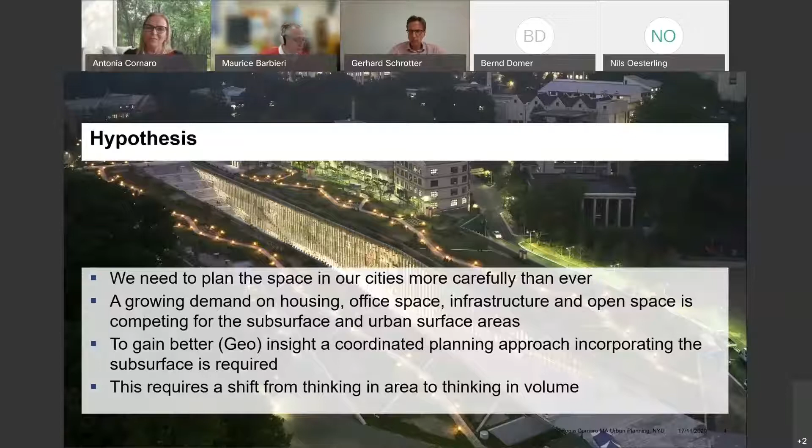I will briefly talk about challenges our cities are facing, the need to visualize the subsurface, which is really very much the topic of today's event. Data, data, data. Where do we get it? How do we process it? How do we use it? And why do we need a new planning methodology for urban planning in general, including the subsurface? A bit on work in progress and some conclusions.

So the use of underground space, be it contemporary or future infrastructures, requires space. And we are rapidly running out of surface space. At the same time, we really want to and need to keep our cities livable. We cannot use every last bit of public space for new infrastructures. And underground space use offers a lot of advantages in that aspect. So what are these advantages?

It is much easier to create unhindered and direct connections in the subsurface. We don't have any surface impact on communities when we construct and house infrastructures underground. Well, let me put it that way, maybe during construction, but not once they are in place. We have no environmental impact on the surface. We have rapid development of a new layer of supplemental infrastructure possible, and we are allowing for new combinations that serve the modern needs of the city, be it data transmission, be it telecom, be it cargo movement, whatnot.

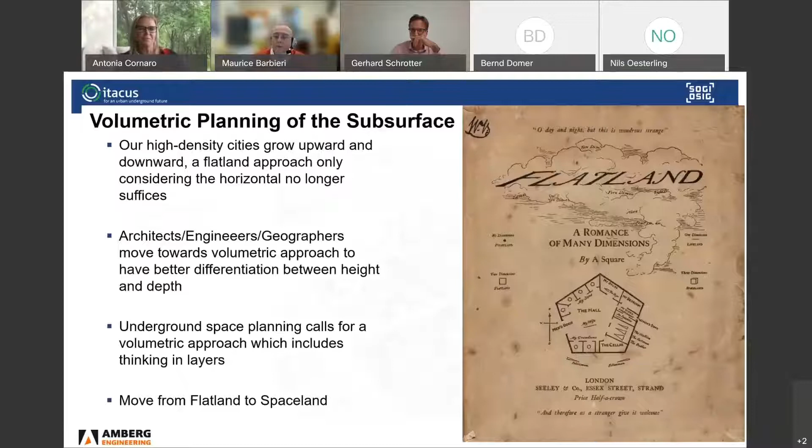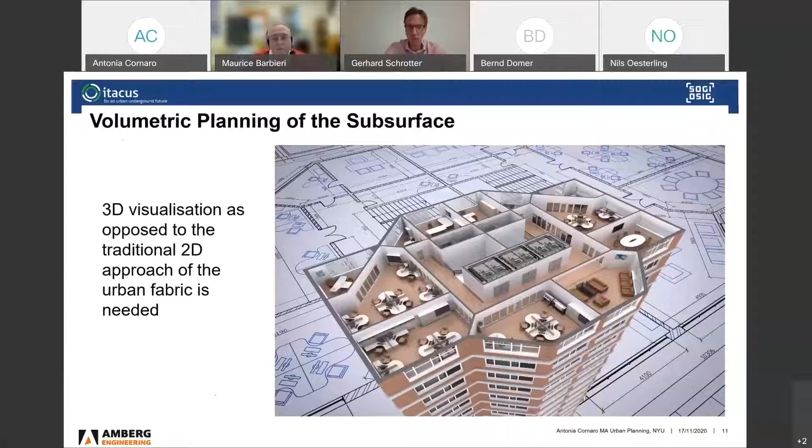So a 3D visualization, as opposed to the traditional 2D approach of the urban fabric, is needed. Traditionally, we have planned our cities in 2D. So we want to really push this to the 3D volumetric approach.

Once more back to Abbott and his Flatland, where he describes what it would be like to live in a 2D world. This existing paradigm, which consists of extending surface planning practice downwards, isn't working. The overarching reason for this is that underground space calls for a volumetric approach. So the world Abbott describes is a far cry from how we actually observe and interact in our physical world, which is three-dimensional. And in the same way, we propose that planning of the subsurface is radically different from how we have been planning our cities up to now.

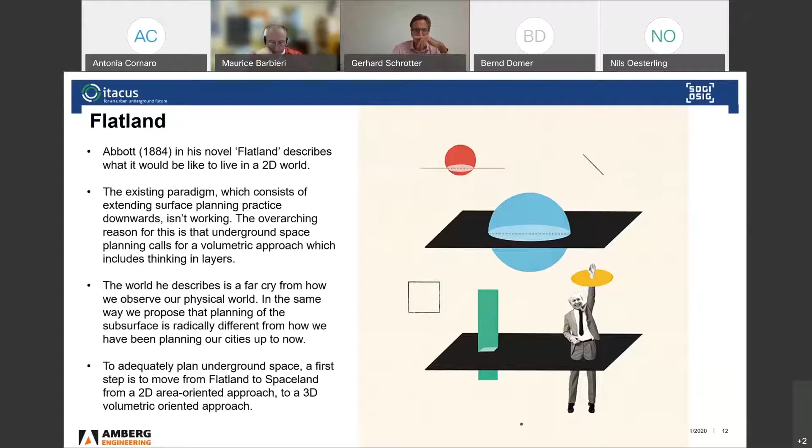So the role of geology in all this is, of course, a big one. On the surface, buildings are surrounded by air. Below the surface, buildings are contained inside the earth. They become part of the subterranean. And the planning approach must be one where the geology is the single most important factor.

So here we have an example of a yaodong. Those are traditional sunken habitations in the north of China, which is a very windy plateau, the Loess Plateau. But there it's also very easy to dig out these habitations. And they at the same time protect the population or inhabitants from the harsh, windy climate.

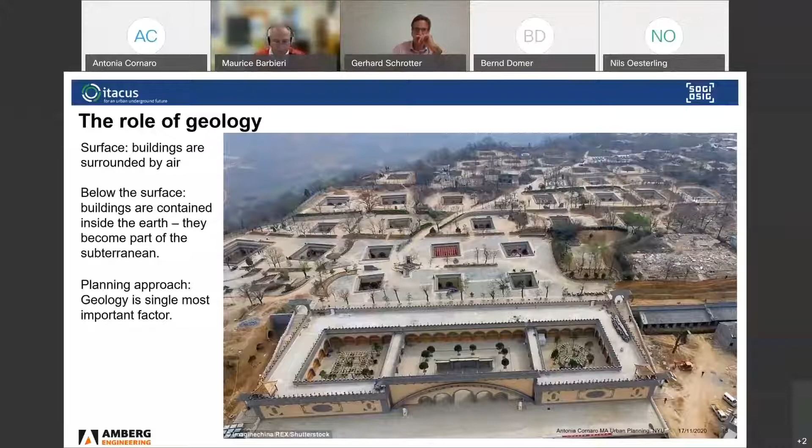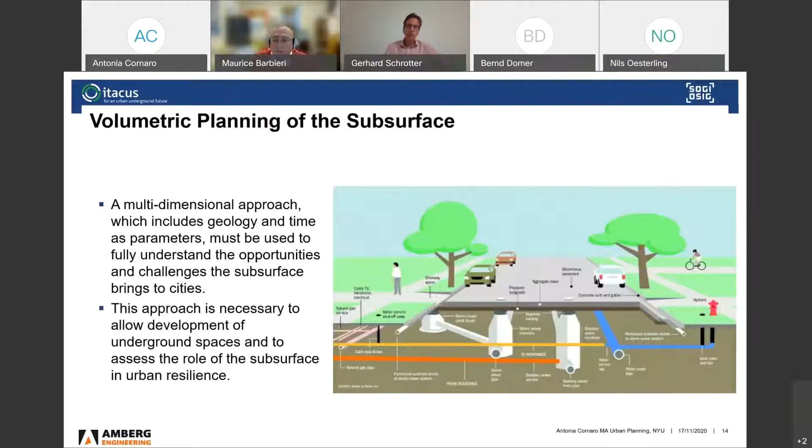So the volumetric planning of the subsurface really needs to be a multidimensional approach, including geology and time as parameters. It must be used to understand the opportunities and challenges the subsurface brings to cities. So which instruments do we use to visualize and analyze 3D? Well, we have BIM, we have GIS, and the technology to visualize underground space is already widely available.

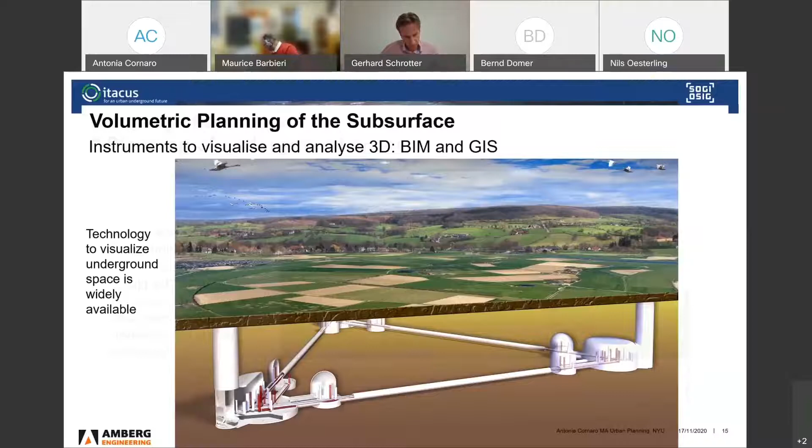However, having the technology alone available is not enough. We really need to develop a new methodology when planning the underground space. And actually, we can think about using airspace as an example. Because airspace, the aviation industry, thinks in volumes. The airspace industry blocks volumes of space and allocates them to certain functions. So I want to ask, is that a concept which could serve as a basis for a new methodology for underground space planning?

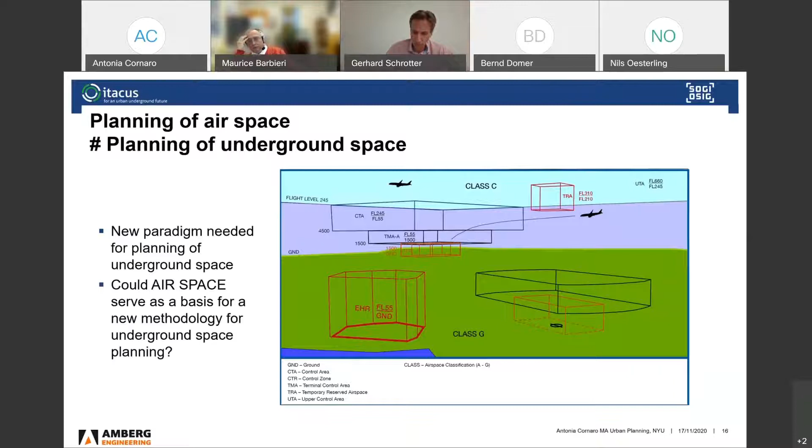How do we deal with data? We love data, don't we? And we need tons of data with what we are setting out to do. Data on geology, on soil composition, necessary to plan and construct underground. We also need data on the cultural heritage, the subsurface houses, archives, archaeology. And we, of course, want to map and visualize existing but also future planned projects. So data needs to be acquired, stored digitally, and made available by combining it in 3D models to support urban planning.

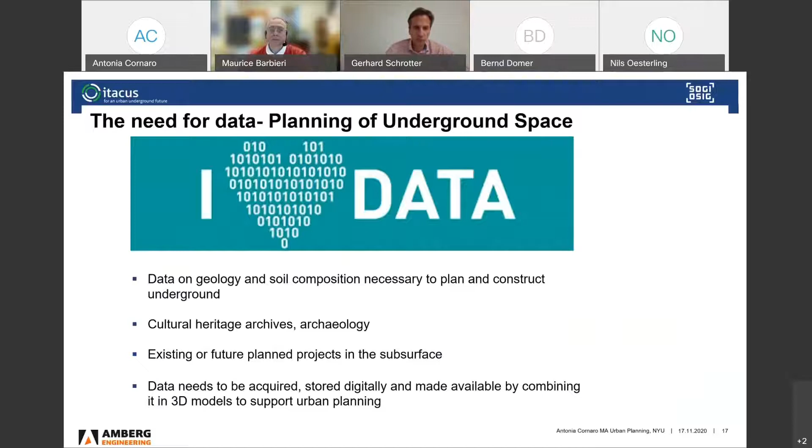"Im Schweizer Untergrund herrscht das Chaos." This is actually a headline I saw in a paper last summer, where the Swiss government is planning a reliable documentation of pipes and cables in the underground. Apparently it's over 500,000 kilometer network. And Swisstopo's answer was, it is time to produce knowledge. What have we buried in the subsurface? How can we use this knowledge to our advantage and plan for a better and resilient subsurface of our cities?

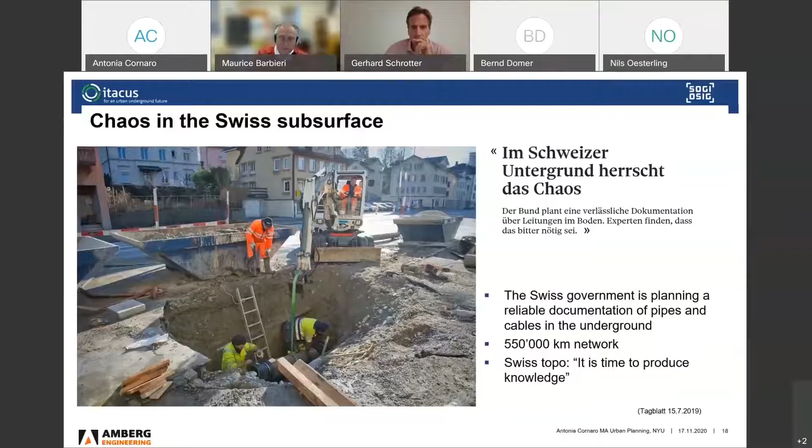Other countries are doing that as well. For instance, the UK with its National Underground Assets Register, where they have to depict 1.5 million kilometers of underground services, keeping their country supplied with water, gas, and electricity, but all run by different companies and owners. So how do you make sense of all that? How do you keep an overview of all that?

So also Singapore has embarked on a big mission in that sense. The digital underground project between the Singapore Land Authority and the Singapore-ETH Centre, because one realizes that the underground is so essential for the planning, administration, and development of its future underground space.

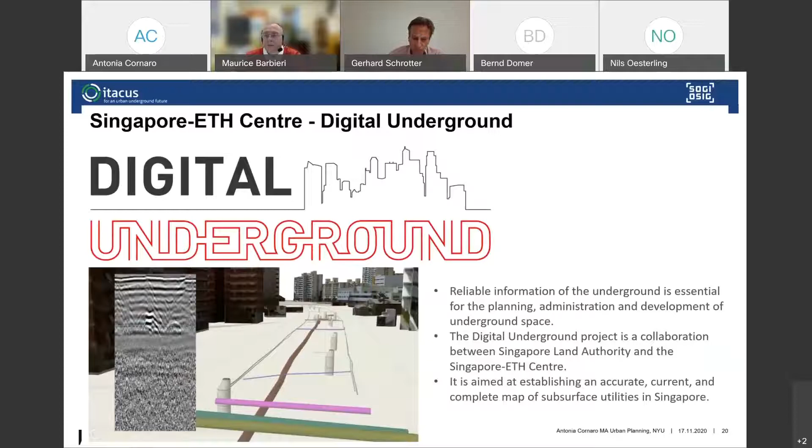So the need for data, there's also the ASK platform, Accessing Subsurface Knowledge, which is a collaboration between the British Geological Survey and Glasgow City Council. And it's really to present all available and future data in urban 3D models. Because a poor understanding of the subsurface is considered a key cause of project delays as well as overspending.

The acquisition of data is by no means easy, and I don't need to tell you because you're all part of this industry. But lacking knowledge of the ground conditions are main reasons for time and cost delays, and due to a lack of regulations for private developers, geologists struggle to develop the models. There's no standard format, it comes at a high cost, the lack of harmonization and information, obstacles to creating 3D models. And of course, the devil is in the detail. Increase of the data that needs to be stored and processed.

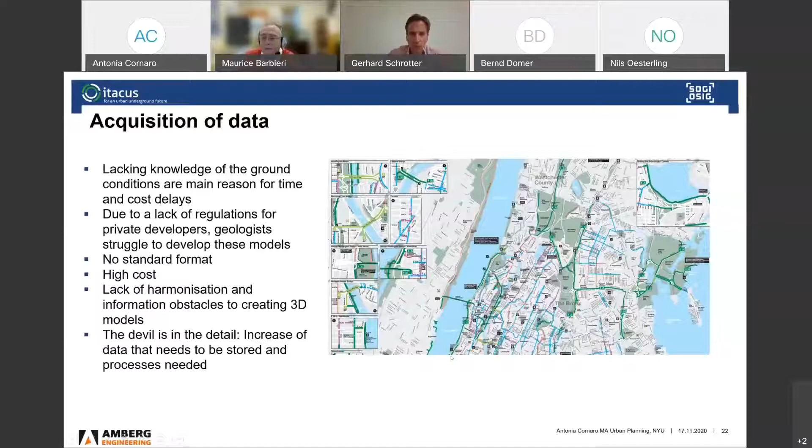But what are the urban planners' needs in all this? Current concepts are very much driven by the needs of geologists and engineers. And urban planners need access to information without the need of specific expertise and know-how in underground construction. So they need simple and user-friendly models.

This is an example of the Deep City project proposed by EPFL, which is really a decision framework based on the resources to need paradigm. It considers resource potentials prior to specific urban projects and plans, and has set out to use mapping as central to the project, using available data, transforming it into maps, and illustrating citywide opportunities. And it considers really the need for urban planners, engineers, and geologists. And that's really where we need to get to in the future.

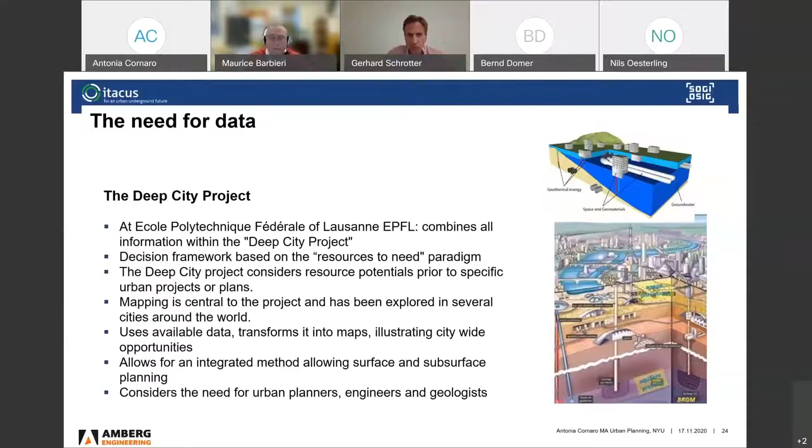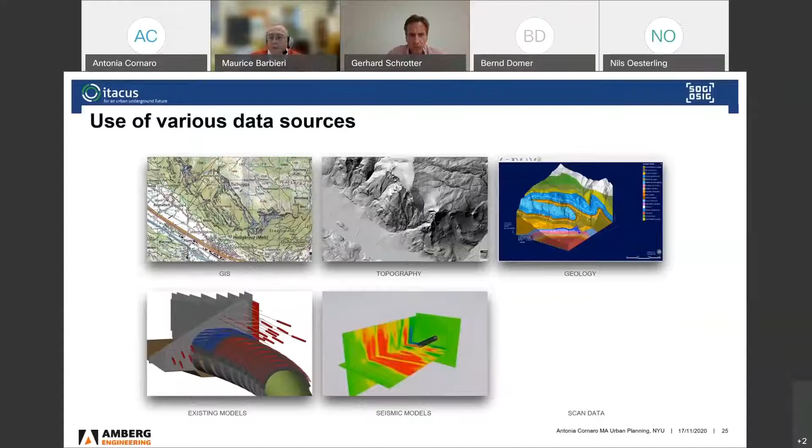Use of various data sources. I have here what we use at Amberg Engineering. So we have topographic data. We have GIS, we have geology. We have existing models. We have seismic models. And we have scan data. We produce multi-source insights out of that. We can really work with this information for our clients and partners and showcase what we're trying to build and where. And we can produce geo-insights.

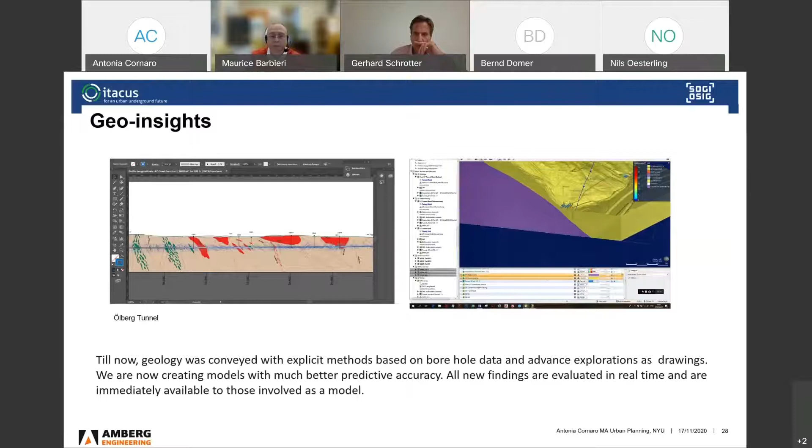Till now, geology was conveyed with explicit methods based on borehole data, and advanced explorations were produced as drawings. We're now creating models with much better predictive accuracy. So all new findings are evaluated in real time and are immediately available to those involved as a model. We're even going beyond BIM. We're calling it geology interdependent scheduling.

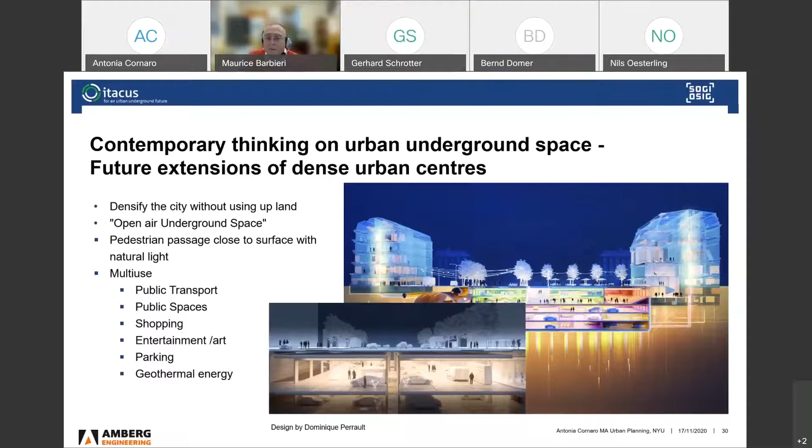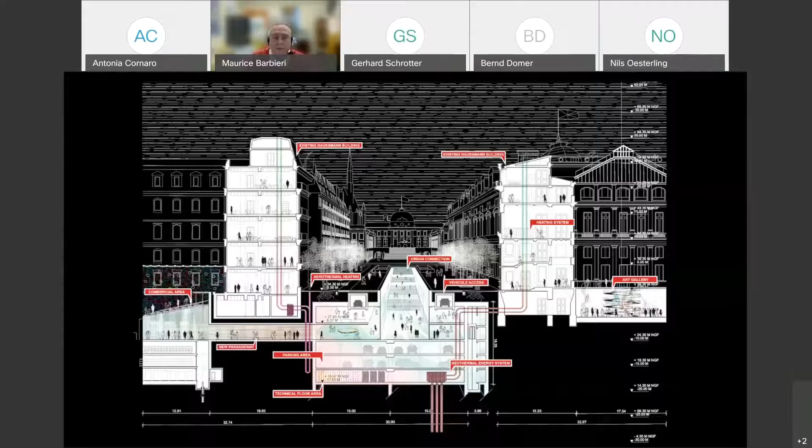The thing is, we need to have a very clear understanding of what we're already housing in the subsurface and what we want to house there in the future to make such concepts work. And in conclusion, I want to say the future is out there, and a large part of that future is still below the surface. The underground space offers as yet untapped potentials, but our job is to unveil what is hidden and visualize and map it. Then we can use it for smart and sustainable city development.

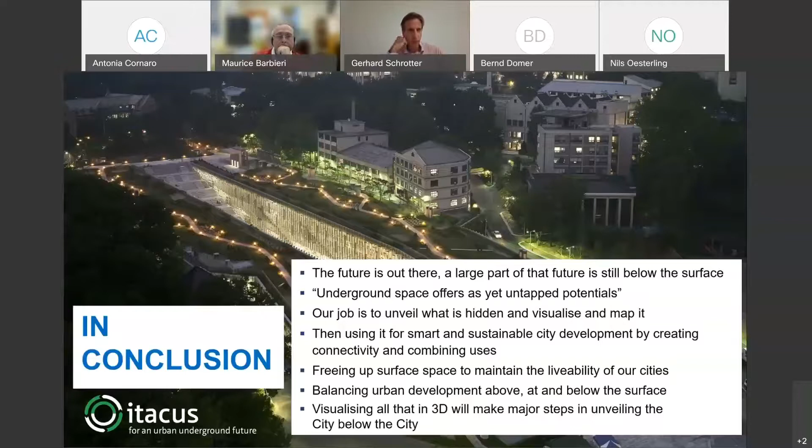We can create connectivity and we can combine uses. And we're freeing up surface space at the same time, maintaining the livability of our cities. We can balance urban development above, at, and below the surface. And we can visualize all that in 3D. And that will make major steps in unveiling the city below the city.